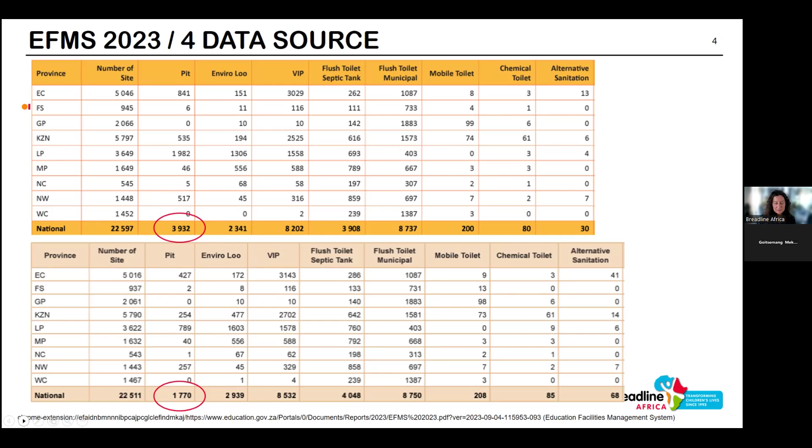Again, this is just the count from the government on the number of pits. So Breadline Africa, where we are right now, if we just have a look at that one, they're saying pits only is that number. And I think that's where even the principal doesn't have a proper flushing toilet. So the problem is huge.

So as I say, we've reached 25 schools already. That's already impacted 12,000 children. If we go to the next slide.

The rationale, and these are pictures, all the pictures I'm showing you are pictures that we have physically taken. This one on the left is a school that we addressed, where you can actually see the toilet has already gone through the basic structure that was put in place. And children have such a fear of using these toilets that they often don't use them.

They will go behind the block or into the open field. So we believe that it's way more than 1 million children. And besides the health risk, wherever we find schools with pit toilets, we also find no hand washing facilities.

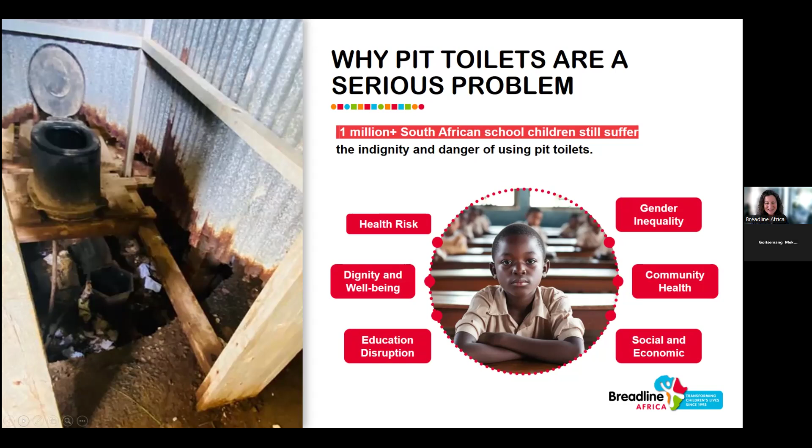So the solution that we've done to date is we've closed nearly over 400 school pit toilets and put in low flush systems. We've also put in dry systems. If there's no water, you obviously can't put a low flush system in unless it's a pour flush, which we can do.

But if there's no water, then we respect that it has to be a dry solution. And in the last 12 months, we've now impacted over 12,000 learners that now have access to flushing toilets.

The one difference that Breadline Africa has over many of the other suppliers out there is that we'll leave no unsafe pit behind. It means that if we work at a school and we replace it, we close every single pit. That is the hazard. When we close it, we either fill it in with rubble that's come down from unsafe structures or desludge it. And then there's a concrete slab that goes over the top, so there is no way that that is going to collapse in on itself. That's one of the really important aspects of the work that we do.

And then if we continue, the return on investment of investing in a school, I mean, it's not just the issue about children being sick, it's absenteeism, it's health costs for treatment, it's parents having to take children to doctors. The spread of disease is incredibly high, but it's also children not staying within school because of absenteeism means they've missed so much schooling, and then the children that don't graduate.

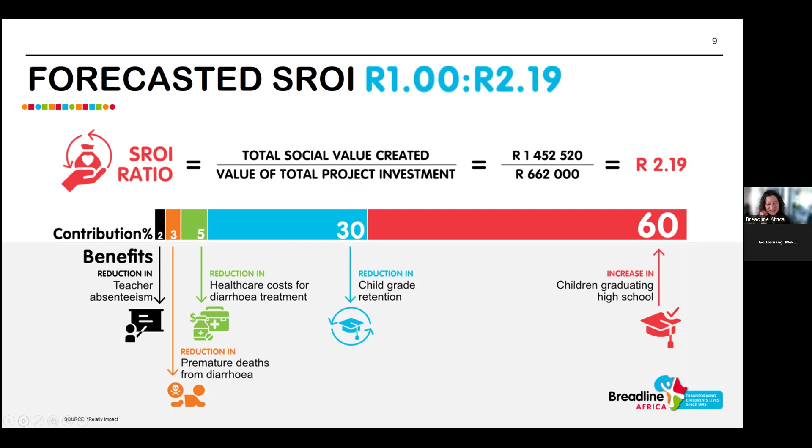The low flush system, which is our preferred system that we put in, because the schools that we work at, there is no waterborne sewage, so you cannot put in a sewage-based system. It isn't going to work. So what we do is septic tanks.

All the components of everything that we use is made in South Africa. We don't import anything, and all the work that we do makes sure that we employ local labor in that community as well. So a low flush system works with all the components on the inside for the handle only, and then all the external components are mounted on the outside and screened off. I'll show you some of those examples as well.

The tank size we generally use is 6,000, but if there are less than 100 children, we tend to not work at that school because that school is at risk of closure. But if it's around 110 children, we may use a lower size septic tank.

The way the septic tanks work is there are 3 chambers in each septic tank that allows the fecal matter, the solids, to drop to the bottom of the septic tank. The water is pushed up at the top, goes into the next chamber. As it fills up, it goes into the final chamber, which is just the water, which then goes to a modular soakaway, what they call an evapotranspiration system.

So that means that if there's less water in your main tank, the fecal matter will decompose aerobically and anaerobically a lot quicker. You do need water, you can't just have a dry system, but the more of the excess water that is pushed out into the soakaway system allows your septic tank to last a lot longer.

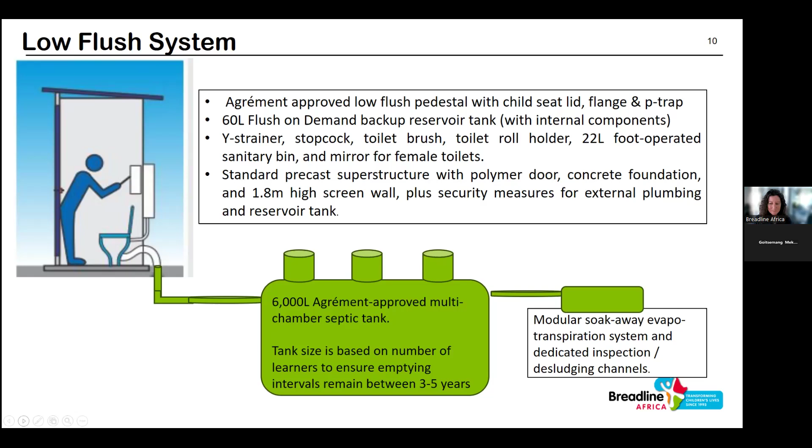The dry system, where there is no water, particularly in areas like the Eastern Cape, even grey water is difficult to come by, so you can't pour water down there at all. We have to go for a completely dry solution. There is nothing else to do but put in ventilated pipes and build a chamber. The difference is our chambers are never more than 1 meter by 1 meter.

They're accessible chambers that can be desludged manually with a portable little honeysucker machine, and they're smaller chambers. The reason for that is a child that falls into a 1 meter chamber won't drown, they can stand. The precast structures we use are cement, but we're now looking at more environmentally friendly structures that will hold up over time.

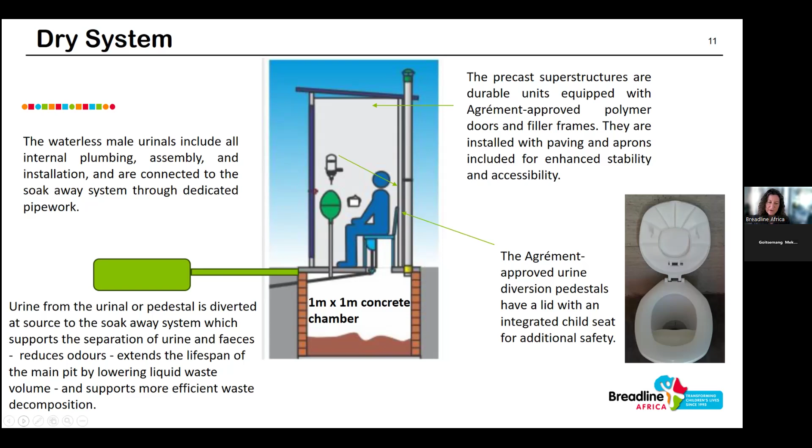The toilets used are urine diversion - there's an example on the right. That urine diversion system means mainly solid matter goes into the concrete chamber, allowing it to last or fill over a longer period of time. But I'll go through some more pictures to show what this looks like. Next one, please.

That is how our finished solution looks. This is in Mount Ayliff in the Eastern Cape. If there's an existing structure that housed the pit toilets and it's still okay, we'll reuse and refurbish it. Very often there aren't enough toilets for the number of children, so we go with government norms and standards of at least 20 children per seat. At the school we just visited, there were nearly 700 children on 6 seats - that's completely unacceptable, so we just put in waterless urinals at schools like this.

We've got the systems - the tank units at the back are mounted onto the concrete walls, each one an individual unit. We also have a screen wall that always goes around, and we lock all the components and plumbing at the back because they tend to make very good jungle gyms and the plumbing won't last long. What you see on the left is the water tank, but I'll talk about that on the next slide.

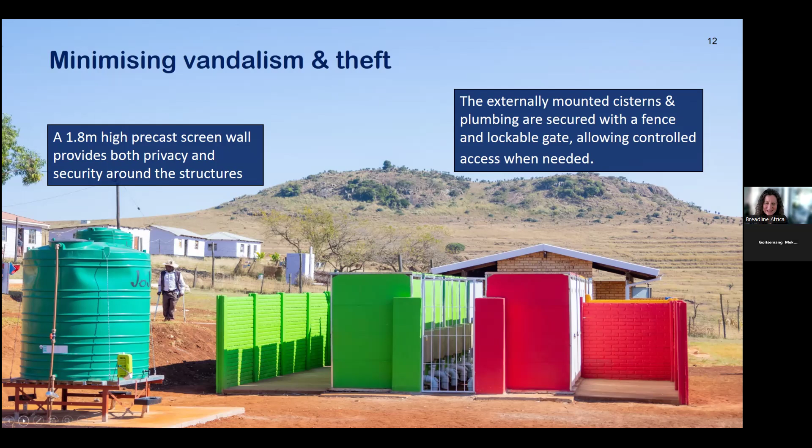These are the systems made in Durban. They can be manually filled at the back or connected to a water standpipe. Every one only uses 2 liters of water, can hold 60 liters, and can take grey water as well. They can be topped up manually, from a main system, or from a gravity-fed JoJo tank. If rainwater harvesting is feasible, we'll also put that in, connected to a JoJo tank that feeds these.

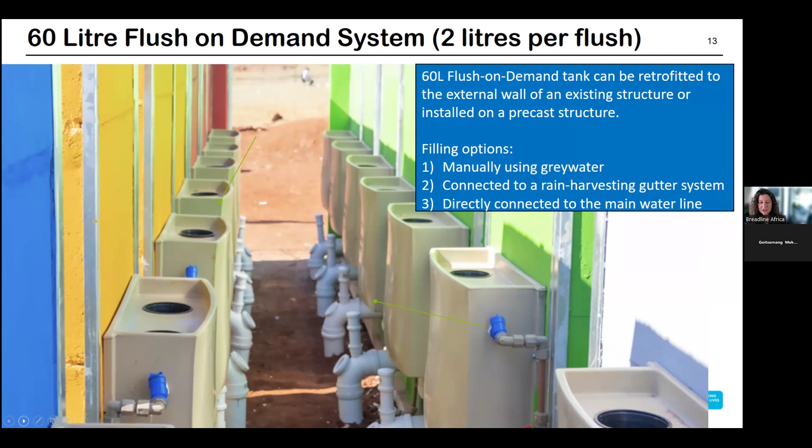Each flush is only 2 liters, bearing in mind a normal toilet can use 9 to 12. The toilets also have a little step on the right-hand side, so younger children have a concrete step they can get up to. They've got plastic molded toilets with seats on top that have a weight-bearing capacity of 400 kilograms, so we're confident there won't be a problem with heavier children.

There are 3 seats: the lower seat, and then the child seat that clips into place, which has an opening of 20 centimeters. Anything more than 20 centimeters for a young grade R child risks the child falling in. It sounds incredibly small, but we make sure that hole is very small. On top of that, you've got the top lid that folds down, so a young child won't be able to lift the safety lid up because it clicks into place, but an adult can.

The doors that we use are also made in South Africa. They're polymer doors, very robust. They let in the light, because most schools don't have electricity anywhere near the toilet, but you can't see through them. They've also got a patented locking system where you can padlock the outside of the door, but the child can still get out - it's got an override, so it's not impacted by the padlock on the outside. No child can be locked inside.

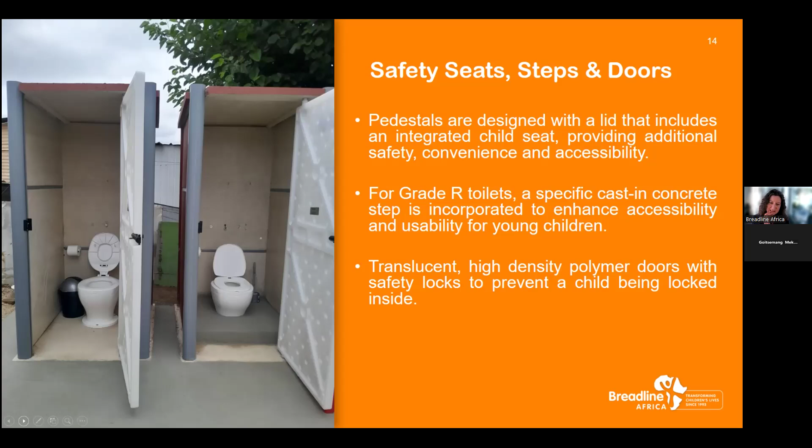One of the things that breaks very often at schools is the flush handle, so we make sure we don't use flush handles. We have a nylon-coated steel pull handle, so it's a pull chain. The child just has to pull that chain, which delivers 2 liters of water. It also avoids any vandalism or breaking of systems - it's very durable. On the next slide.

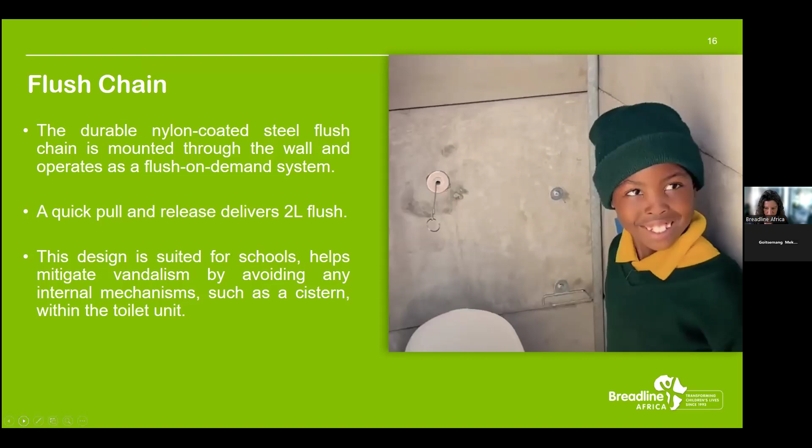Next slide. And then just to give an idea of what it costs - there's always this perception of why would it cost anything between 35 to 40,000 per seat per child. But that's because all of these elements combine together to take that cost up to what it is. People say, well, a toilet at Builders Warehouse only cost me 5,000 Rand - how can you get this cost to 35,000 Rand per seat?

But in many of the areas we have to do tree felling, soil testing, put in concrete foundations, take down other structures - there's a lot of concrete work that goes on site. The JoJo tanks, the piping, the connections, all of that adds up to approximately an average of 35,000 per seat. This includes a 5-year maintenance contract on that school, where they do regular inspections - if there's any problem, blockages in the pipes, any breakages, they fix it, and any desludging that's required.

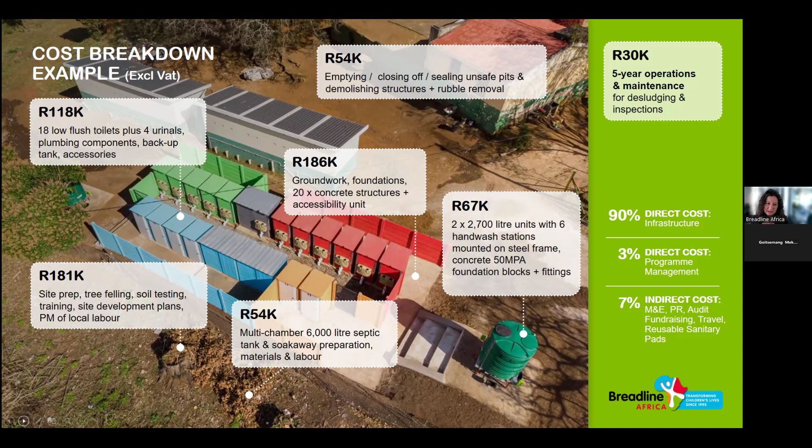On that particular slide, the structure in the background with the grey roof was there when we arrived at the school in Umsunduze, in KZN. That was a government-built structure as a solution for their pit toilets. The supplier put in fantastic toilets that looked amazing on the inside, however they didn't put in a septic tank - so within a week, you can imagine the toilet started overflowing because it didn't go anywhere.

At that stage we didn't do anything with those government toilets - we hadn't started our partnership with the government yet. So we felt we couldn't work on a toilet solution that was incomplete, so we built them extra toilets. But at any time, the school can go and add another septic tank and make those other toilets function as well.

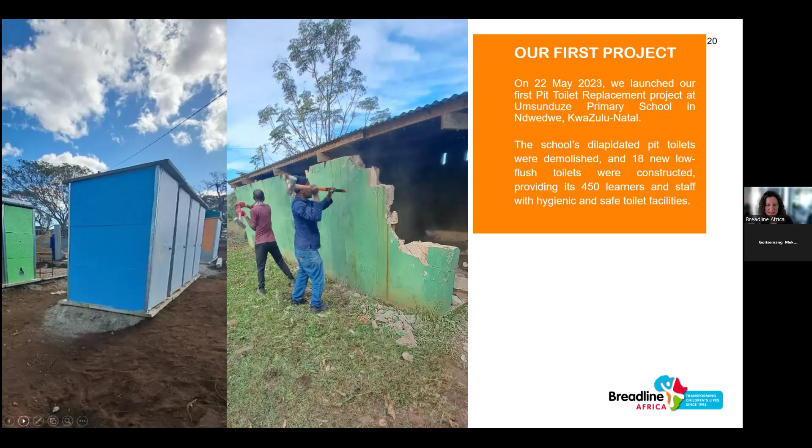Right, next slide. So we started with the first project in May last year at Umsunduze Primary School, taking down all the old structures. At that particular school, we ended up putting in 18 toilets, and there were 450 learners - so that's just to meet the ratio. Next slide.

Now we're going to go through these slides quite quickly. These are all examples of schools before and after, and what they look like.

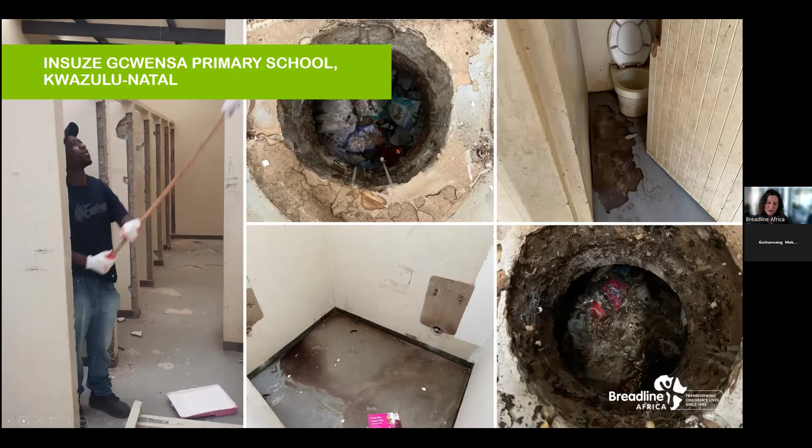If the structure outside was sound, we could work inside the structure, close those pits, get rid of all the old toilets, repaint it, redo the doors, etc.

On all of these, whenever we go to a school, 70 to 80% of the work is done using local labour. We connect with the business forums and the school governing body, and they select the labour from the local community that will come and work on this project, for work experience, but also to get the community involved and buy into the project.

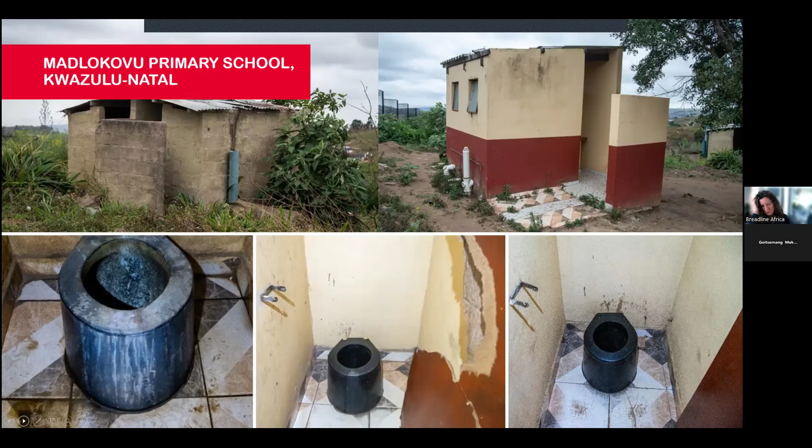We'll keep rolling through the slides. These are our schools again, another school in KZN, showing the before and after solution.

What we take so for granted, the simple aspect of flushing toilets, is life-changing for so many of these children. We've experienced the smiles of children who for the first time see the toilet flushing, the amazement that they can look down and just see a white toilet bowl and not see contents, and the fear of snakes, spiders, flies, and everything else.

I think the biggest thing is the overwhelming stench. I cannot describe the smell, and in some of these schools the smell of the pit toilets disrupts the classrooms. That was a before and after you just saw there. They can't teach the children, because in summer it is so overwhelming.

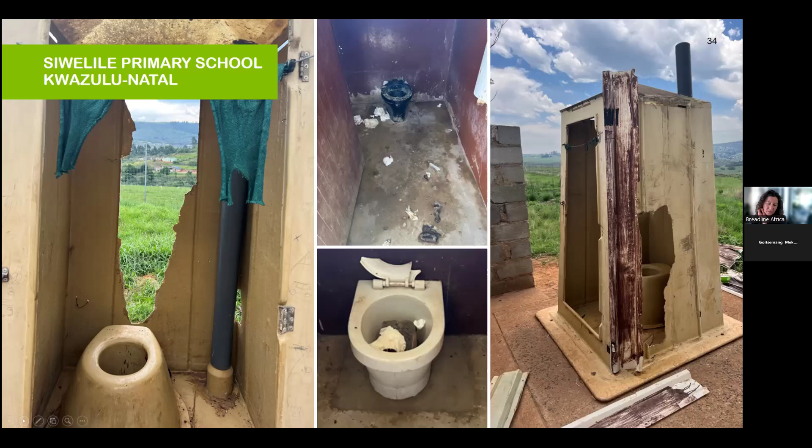This was a school that was just incredible. While they were still constructing, the children were still using the old pit pedestals.

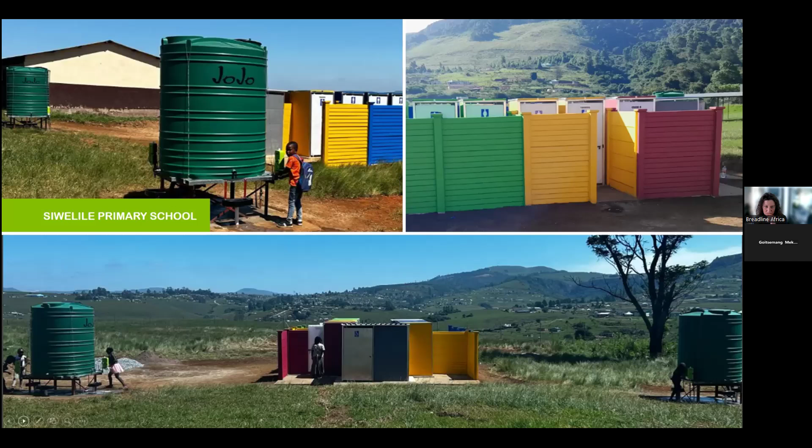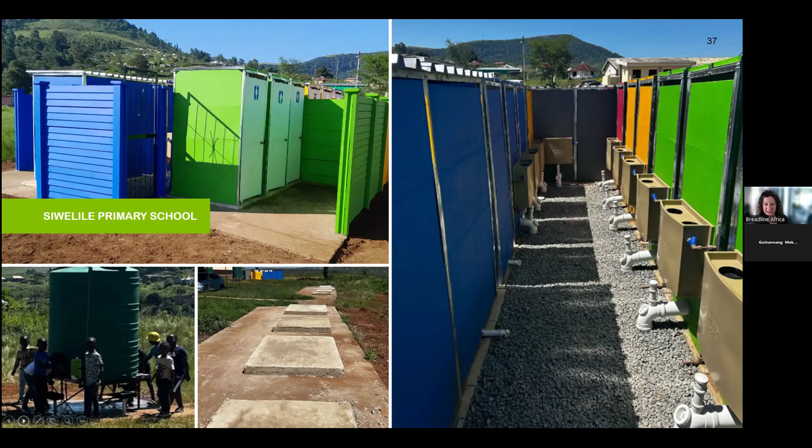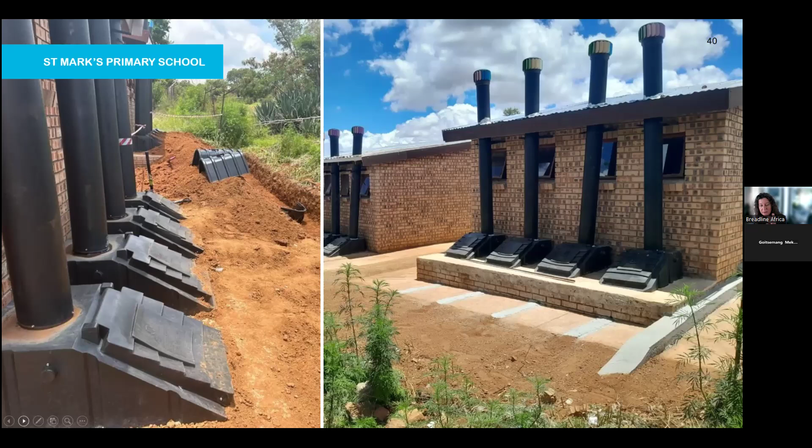Those are the Enviroloos on the black structures that you see. The plastic often breaks in the sun and they often collapse. So at this school, all the toilets were blocked, nothing was working, and what we did here is go in and put in the plastic long-lasting toilets.

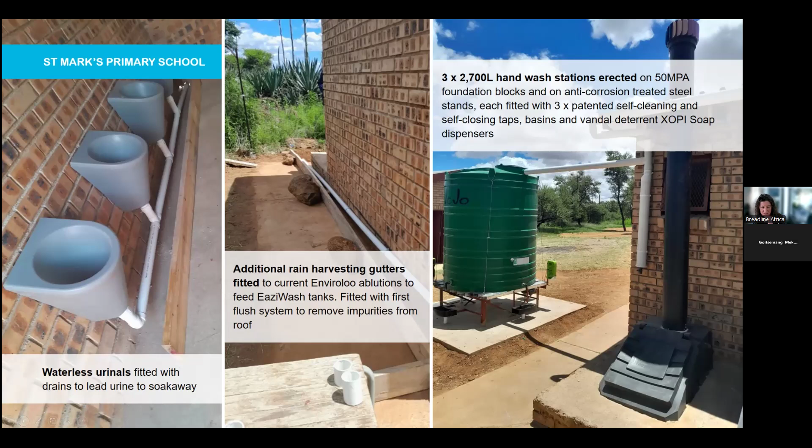Here was a modular soakaway system being put in to connect all of this: the waterless toilets, the rain harvesting system, and again the JoJo tanks were put into the school. We'll keep scrolling through.

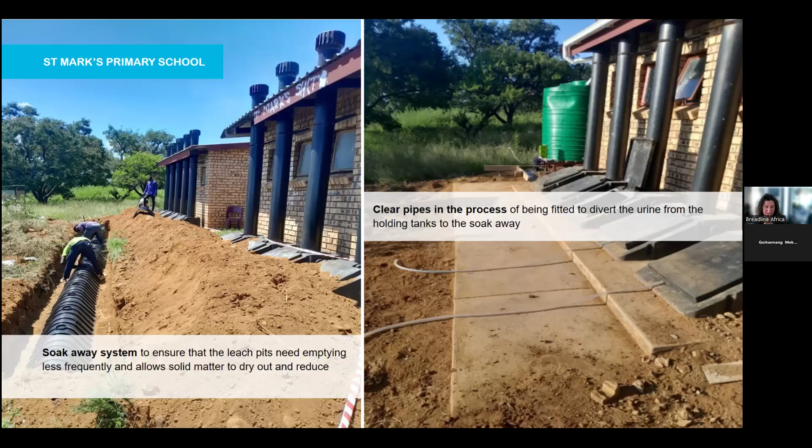There's an example of the modular soakaway system on the left, and those toilets you saw just now ended up looking like this by the time we'd finished.

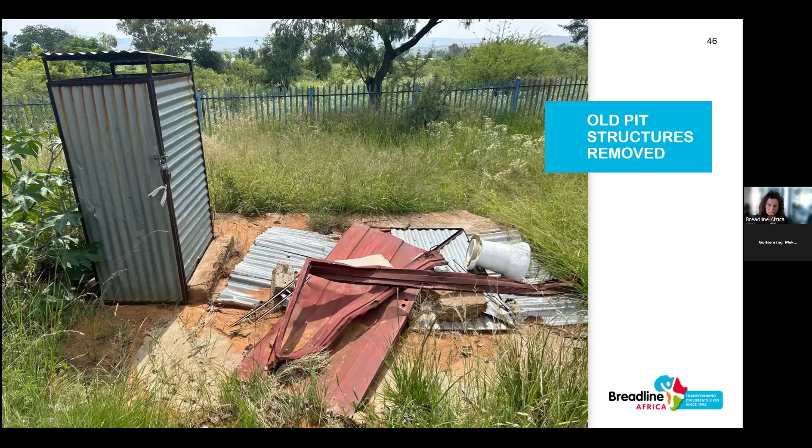Anything that lies around like this becomes a hazard, so everything gets cleared away from the school. This was a completely dry solution in the Eastern Cape.

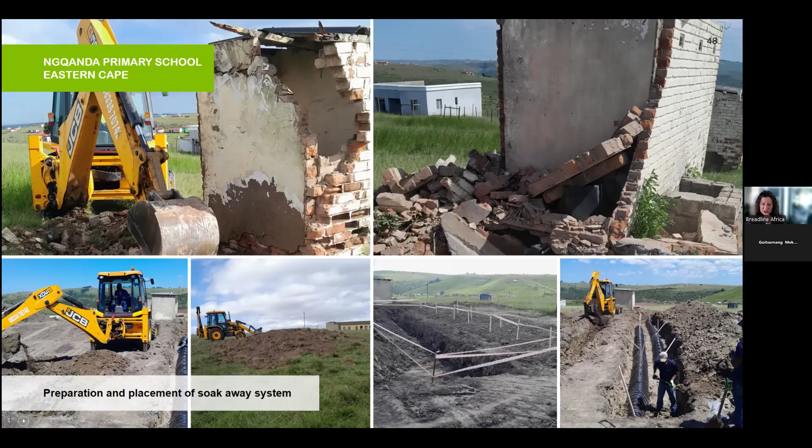This was what it looked like. We demolished everything; nothing could be saved here. On the bottom right, the modular soakaway system going in, and these are the one-meter lined chambers, so there is no leaching into groundwater.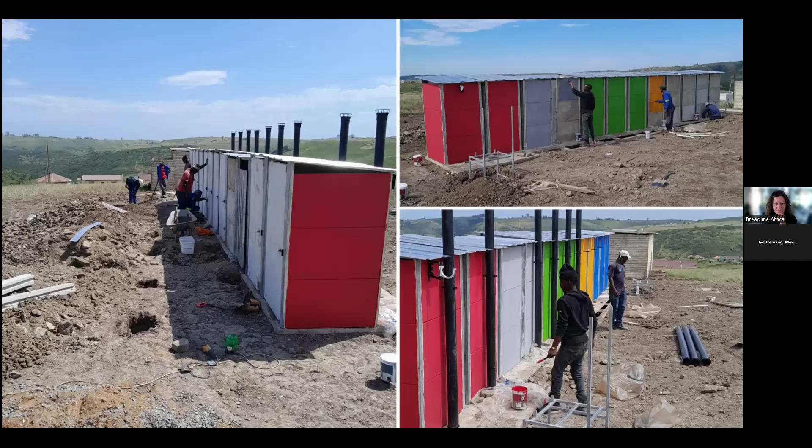This was the work in progress as they were doing it, with the vents as well to take away the smell. With a ventilated toilet, you are always going to get a slight smell, but nothing compared to the smell of an open pit.

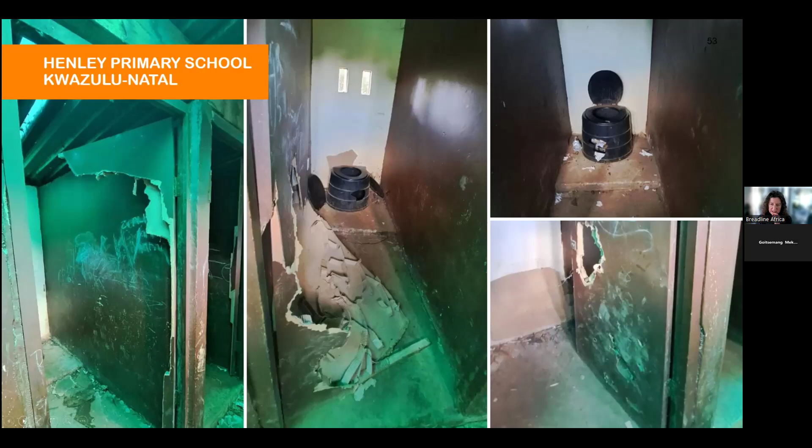This was another school in KZN. All of these structures were actually unsafe and we destroyed all of this, flattened it, removed everything. This was their solution at the end.

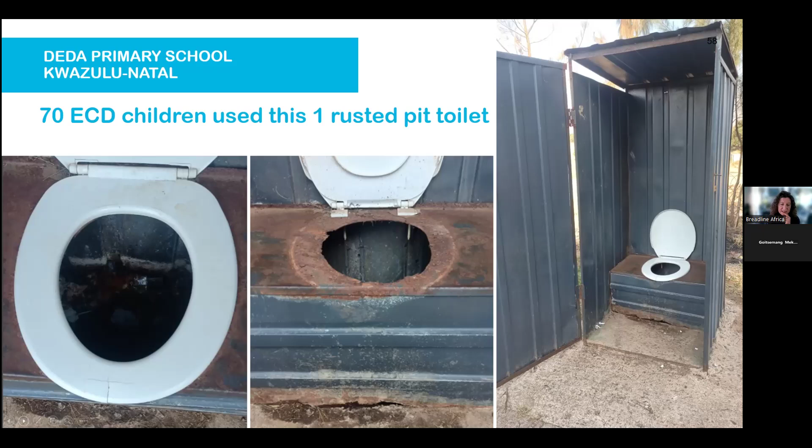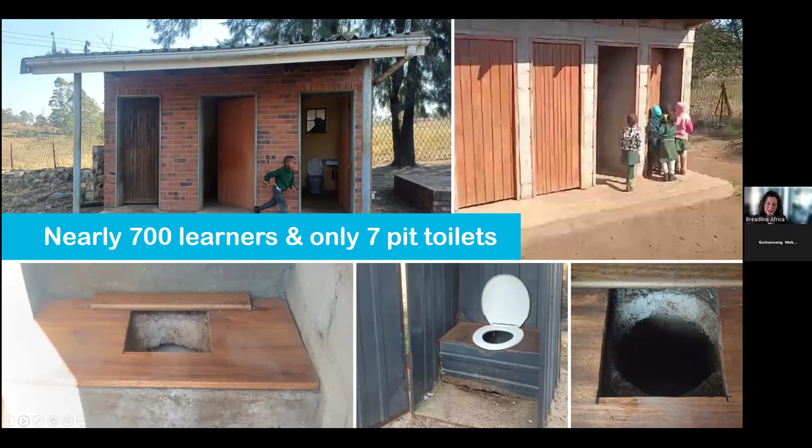This is the one we launched yesterday with the Minister of Basic Education, and that is what 70 children were sitting on. If you look at the bottom of the middle screen, you'll see the rust on those toilets, which means underneath that is a gaping hole, and that was already full. So for 70 children using that, it was a real safety hazard.

This was left on site, where previously the toilets had collapsed. So we removed all of this and launched this one yesterday.

Again, we refurbished the existing toilets on site. We'll just keep going through.

So what we've looked at is the government SAFE project, and what hasn't worked at many of the schools, and what we can do differently is work with approved suppliers. We have a preferred supplier, they have a standard that we follow, and they're able to scale up very quickly.

It takes us literally 2 weeks from when we start at a school to when we finish. Some government projects can take up to 6 months and cost millions. Our solutions are as low as we can get them in terms of cost. We also do in-depth monitoring and impact reporting for funders that require that level. Government standards have to be adhered to. We engage with traditional leaders and local education departments, and we have multiple solutions as I've spoken about: the low flush, the dry, and the retrofit.

Okay, then on the impact. This was a report we've done for the Development Bank of South Africa. They funded the removal of pit toilets at 8 schools. So the impact team would go in and have a look at data at those schools - there were 2 schools in each province of the affected areas, and the number of children and educators is recorded. Then they go through looking at a baseline before we start and identify the key issues faced at those schools, from satisfaction level, safety, illness.

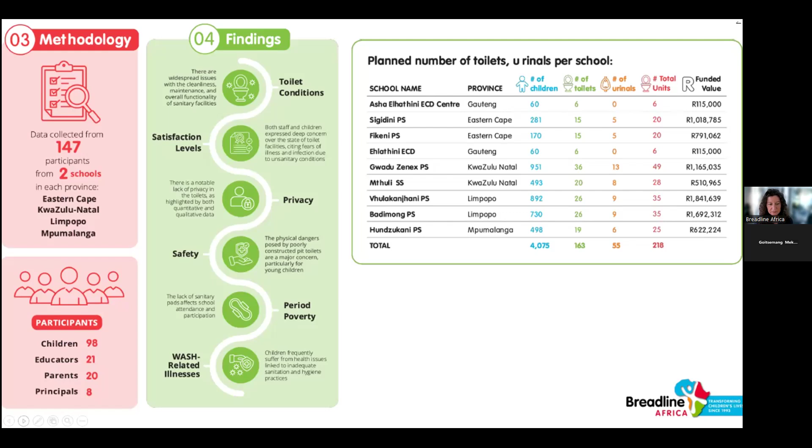The report that we provide is: at baseline, we'll go back in 6 months and do a midline, and in 3 years do an end line. We monitor all the different aspects of the findings and what the needs were. We put in recommendations, then go back and see the difference, working with focus groups with the girls, the teachers and the SGB to understand if this is actually having an impact on the educational outcomes of the children at the school.

That's a couple more slides and then I'll take some questions. Go on to the next slide. This is a list of schools that we now have ready to go.

They managed to get him out, but he got badly cut on the way back up again - so traumatized. The children burn fires outside the entrance of their pit toilets because of the snakes that are in there.

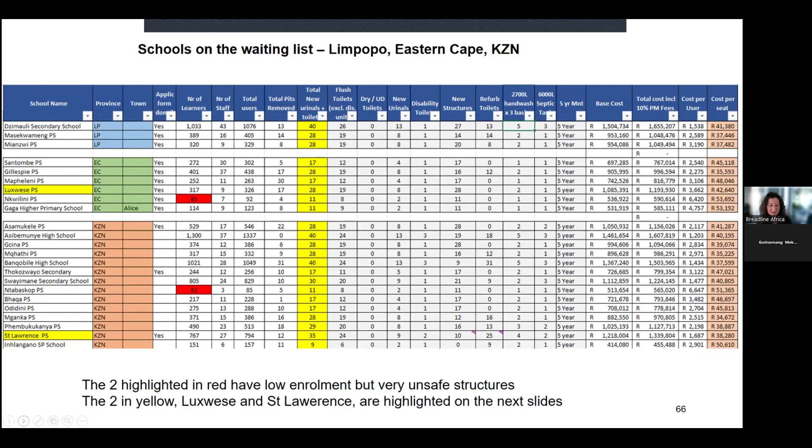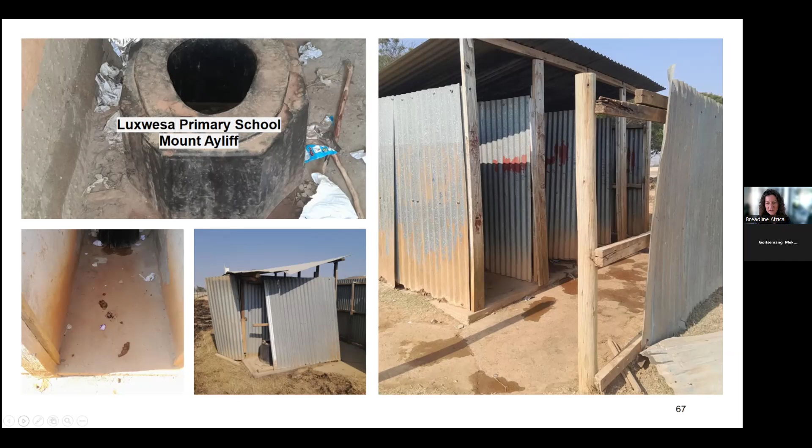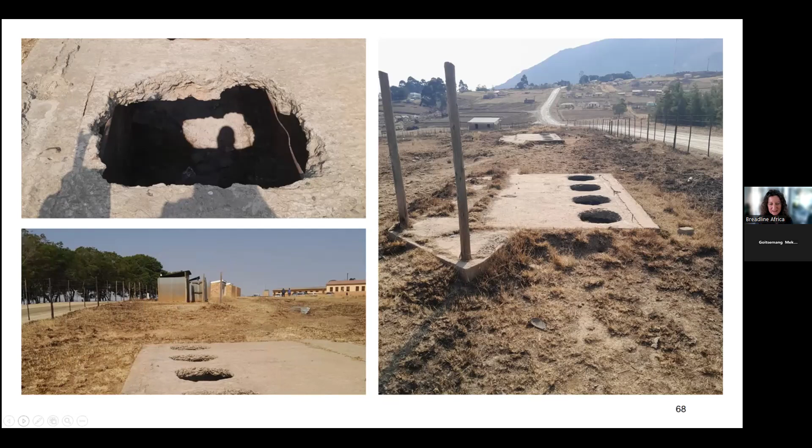And then this is also classified as functional toilets - no privacy. So it may be a little bit safer if that concrete doesn't collapse, but this is right next to a road where children have to squat. That was a video, so we can just continue.

Okay, the next slide. That's it. Right, so I'm happy to take any questions.